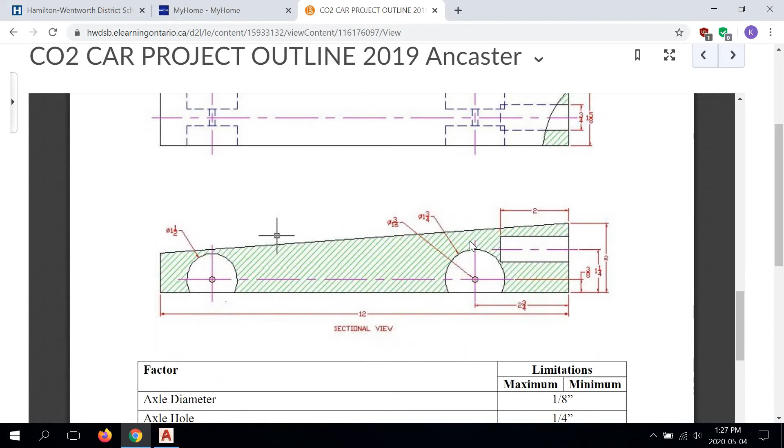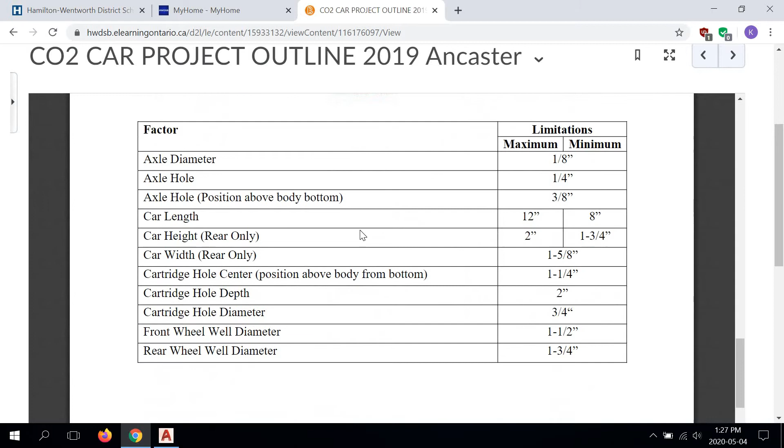Now, one thing to note, if we go into project outline, CO2 car, rear and front wheel wells are the same sizes used in the shell drawing. So we're using, again, 1 3/4 for the rear, 1 1/2 for the front. So nothing has changed in terms of diameter.

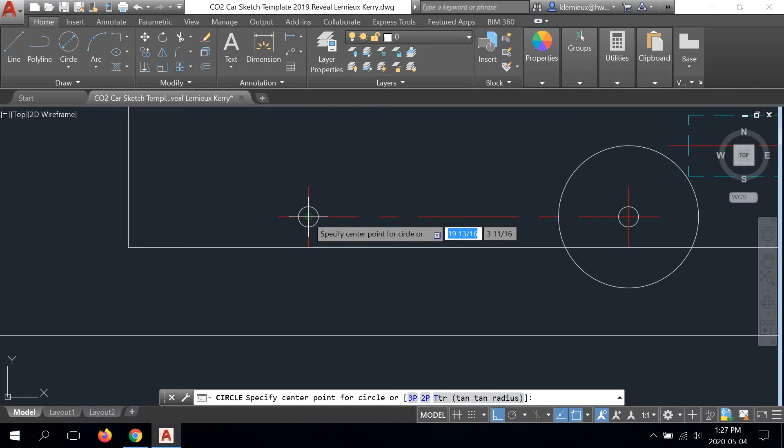So when we start with our drawing, we're going to use center diameter. We're going to start with our side view, snap the center of the axle hole, and then draw a circle at 1 3/4. And again, another center diameter circle for the front, and the front is 1 1/2 inches. As before, we're going to trim the bottom arc from the bottom of the CO2 car.

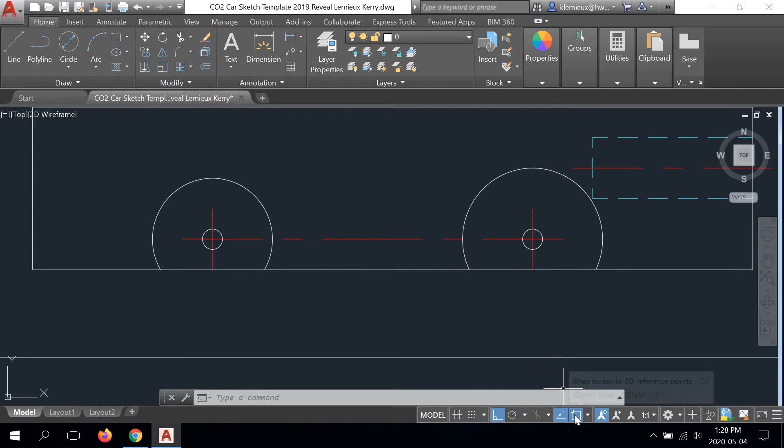And our center line is going to be gripped and extended 1/4 inch along this vertical quadrant and this horizontal quadrant on both sides. So make sure, if this isn't on, go into your Object Snap settings here, right click, left click Object Snap settings, and make sure Quadrant Snap is turned on to allow this to happen. If it is, hit OK. Mine's already turned on. And I'm going to pick the center line and I'm going to grip it 1/4 inch.

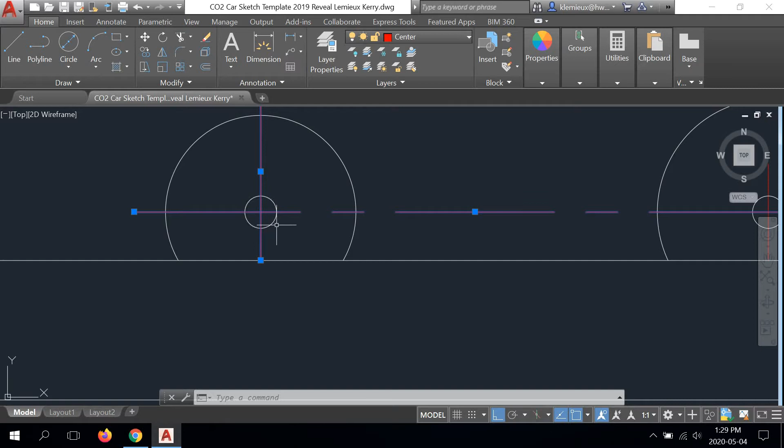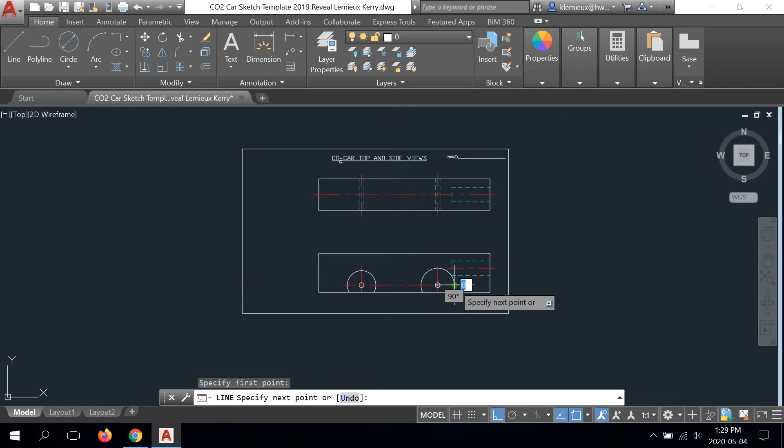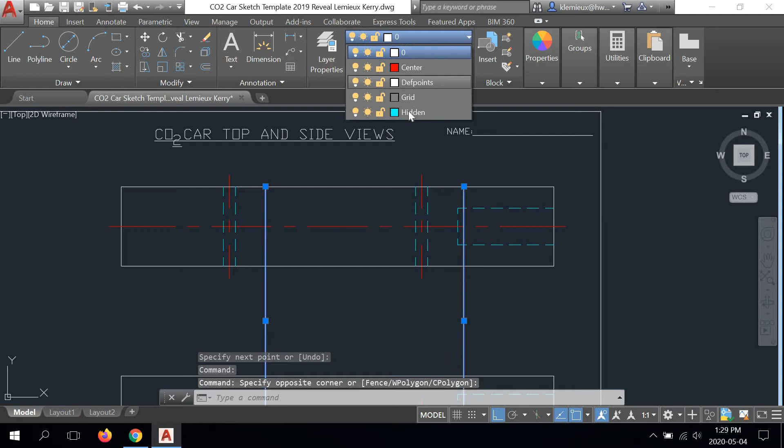Moving on, I'm going to use a line tool, go to the quadrant, draw the line up to perpendicular, and I'm going to do the same thing here. These lines are going to be turned into hidden lines, and I'm going to trim them.

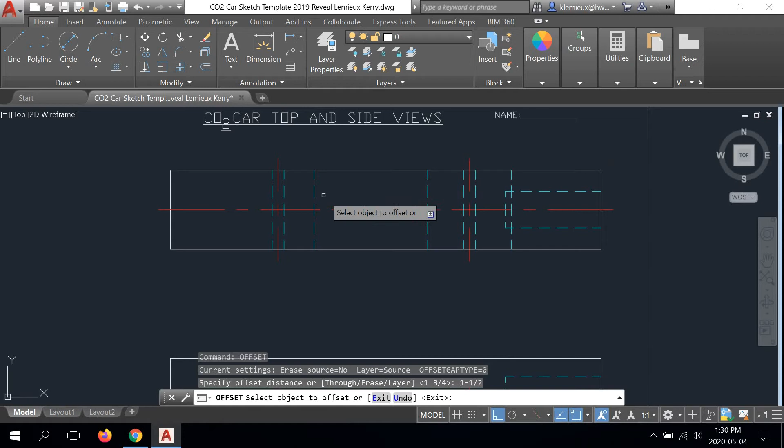Instead of drawing a line from this quadrant up, I'm just going to offset the last two lines. So we're using 1 3/4 at the back. Right click, repeat offset, and then we're going to use 1 1/2 at the front. Okay.

Now, the sheet said that we would use 5/16 at the rear if we want half our wheels to sit outside the body and half of the wheels to sit inside the body. So let's start with that. So we're going to go 5/16 offset. Offset this line up and this one down.

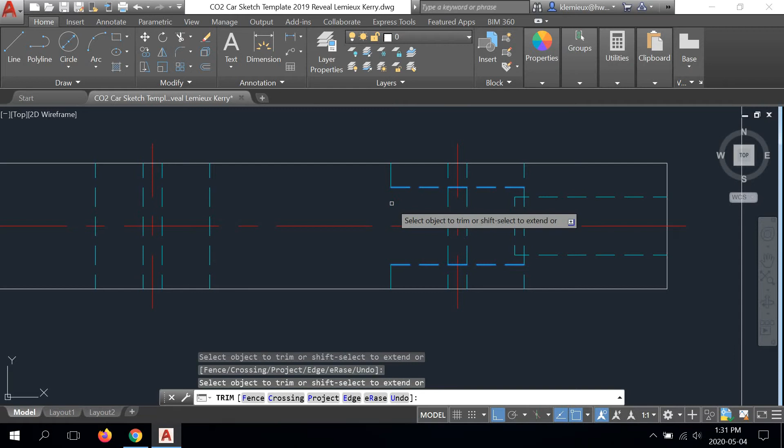We're going to trim, this line and this line are going to become hidden. And we're also going to be trimming between these two lines as boundaries. And so in this case, this section is solid and this section is shelled out on the exterior side. So we have a little bit more to do.

We have to trim the axle hole that's sitting inside the 1 3/4 diameter on each side. So we're going to trim the axle hole here and here, and there I have it. So that's how that would look correctly. That is a reveal style wheel design. And if I measure this, I'm getting 5/16 per side.

So this is an offset you can use if you want to have half your wheels inside your car, half your wheels outside your car. Now, what would it look like if you wanted all of those wheels inside the blank, right? We would have to increase our offset value. So what we can do is erase these lines, and we can use the 5/8 offset this time.

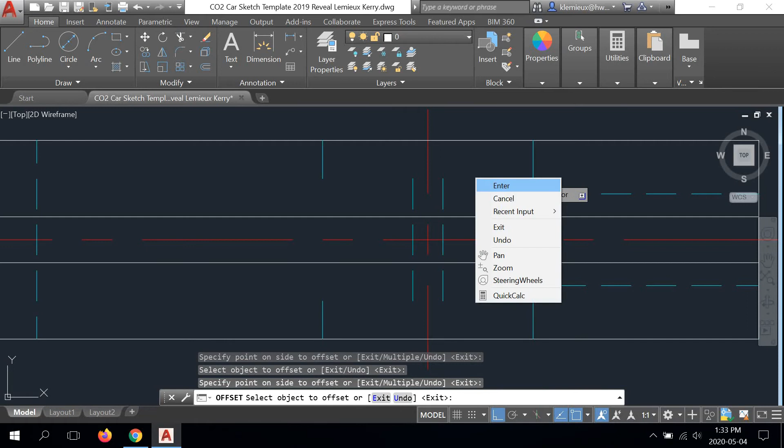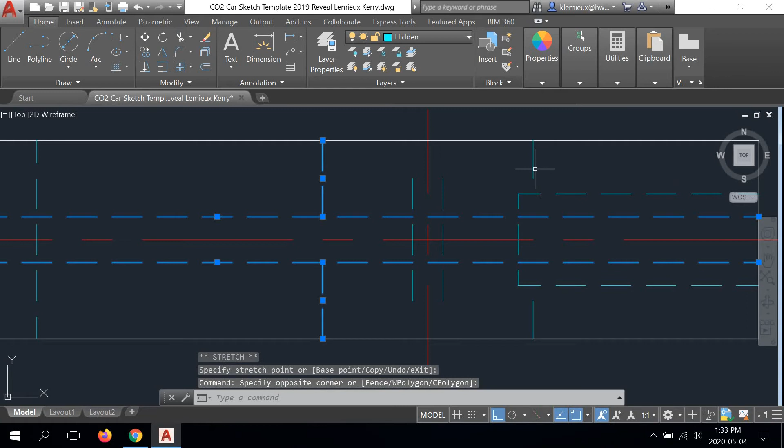And again, offset like this. These lines here are turned into hidden lines, and we have to extend this line perpendicular to the perpendicular snap. And then trim. And then we're going to trim again.

And that's what that would look like if you wanted the wheels totally inside your blank. So a little deeper, we've got 5/8 per side. And that leaves us with 3/8 of axle hole for our wheel bushings. Okay, so we're going to take a look at the front now.

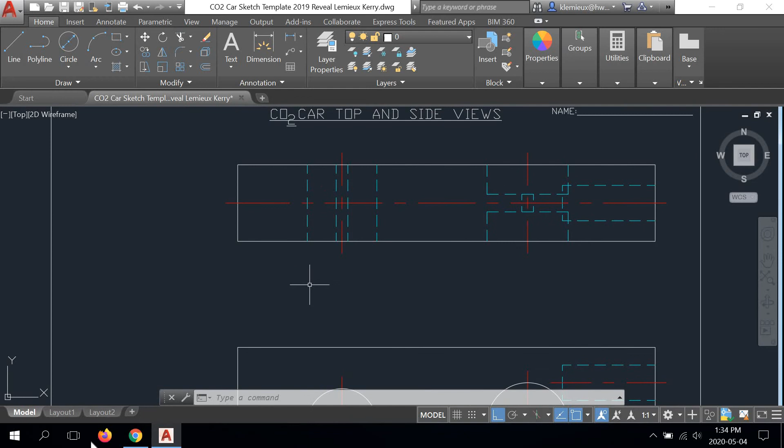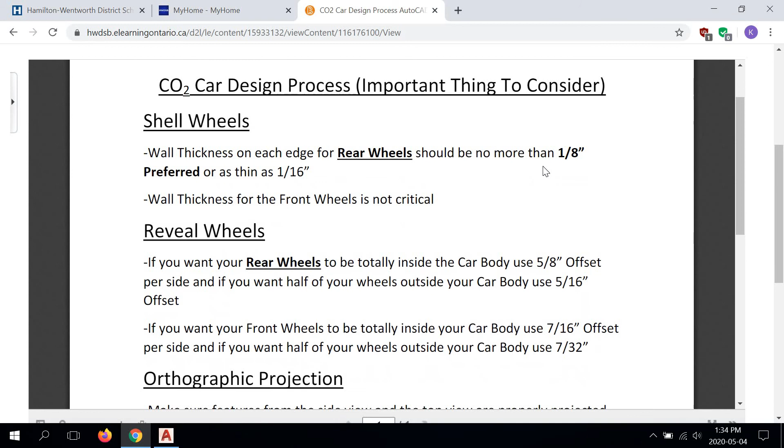So let's take a look at our design consideration sheet once more here. So it says if you want your front wheels to be totally inside your car body, use a 7/16 offset per side. And if you want half of the wheels outside your car body, use a 7/32. Okay, so a 7/32, that would be quite shallow. We'll start with that.

And it's the same deal as before. We're going to make these lines hidden. We are going to trim on either side of the 1.5 inch exterior boundaries here. We're going to trim between these two lines for the depth. And then lastly, this line and this line, which are for drill depth, are going to be used as boundaries to trim away the axle hole passing through air.

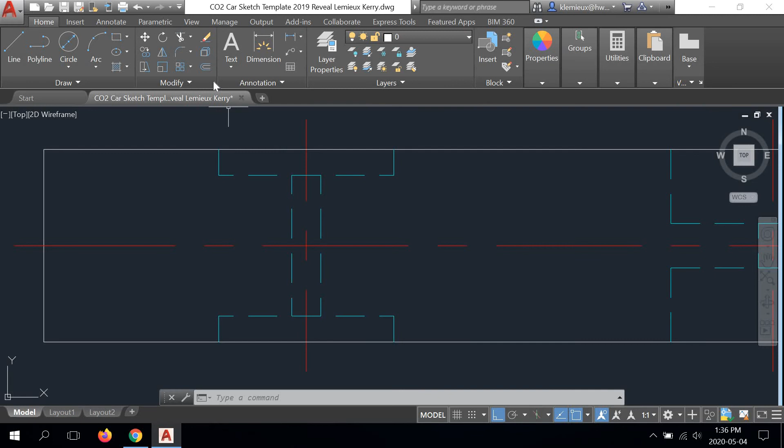So that's what your front would look like if you wanted half your wheels sitting inside and half your wheels sitting outside. Let's just do what we did to the back to the front. Let's take a look at the full drill depth size. So that is 7/16. Looks like this.

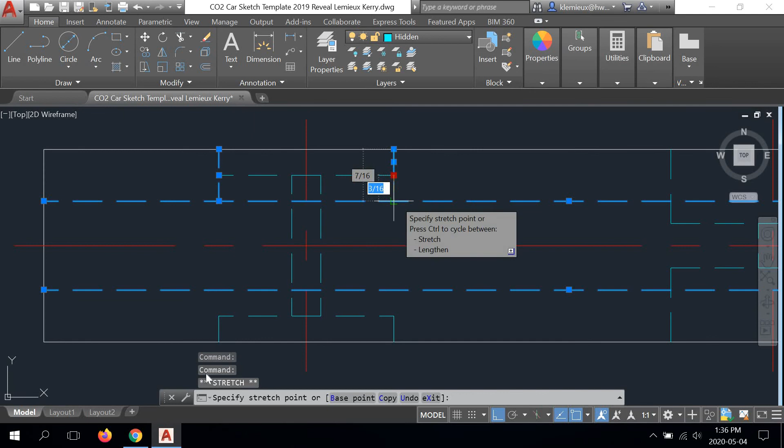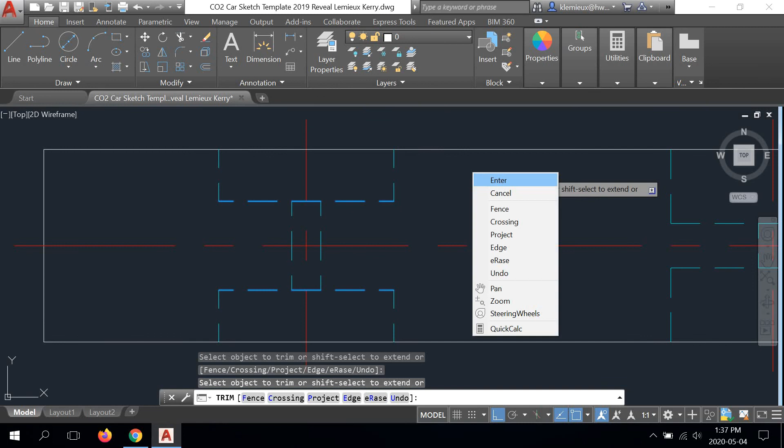So again, make these lines hidden. Use a grip. Snap these drill depth vertical lines to the perpendicular snap. And then we're going to be eliminating these two lines. We're going to be trimming away what we don't need. This line, this line, this line, and this line. Then lastly, these two lines as boundaries to trim away this extra axle hole depth. And that's what that looks like.

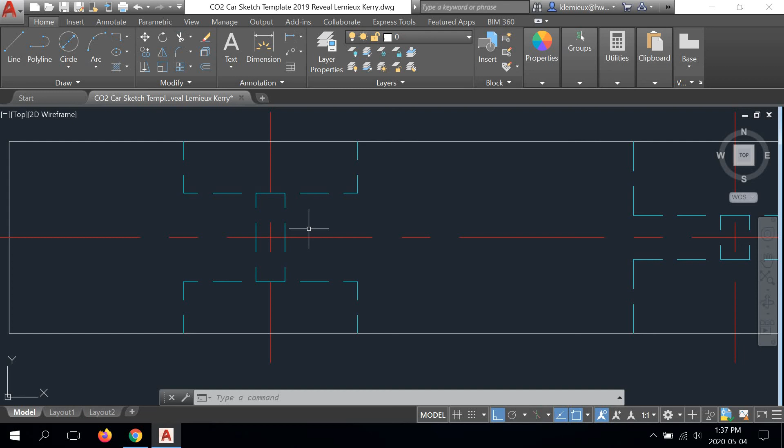Now, just because you see these numbers I've given you here doesn't mean you have to use them. These numbers are not set in stone. So you could, if you wanted, drill your front axles deeper than I'm showing here, or more shallow, or you can even drill these holes deeper if you'd like. It doesn't really matter. I'm not going to be marking it wrong if you don't use the offset values that I showed you today. The only thing that I care about is if it's being shown correctly, the correct orthographic projection, and that these features are lining up properly with one another.

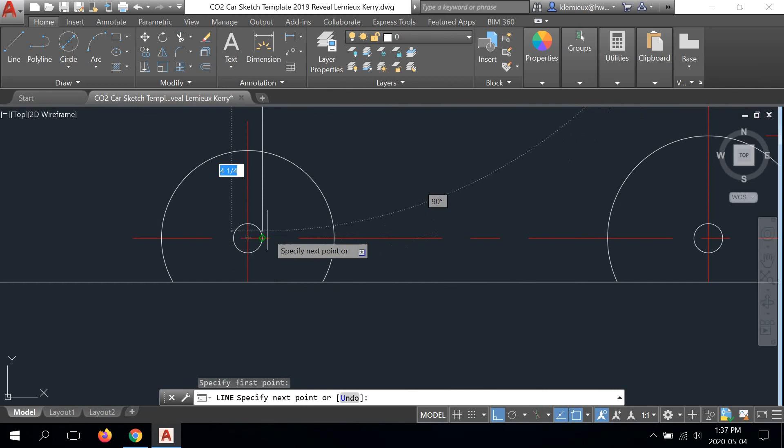Meaning, if I drew a line from here, would I meet the edge of my axle hole? Yes, I do. Right? So that's how I check these things. So again, I can draw a line from here, come down, and go to the quadrant of my side view wheel well. So drafting orthographic projection is very important. The numbers you pick for your drill depths are not so much. So just wanted to clear that up.

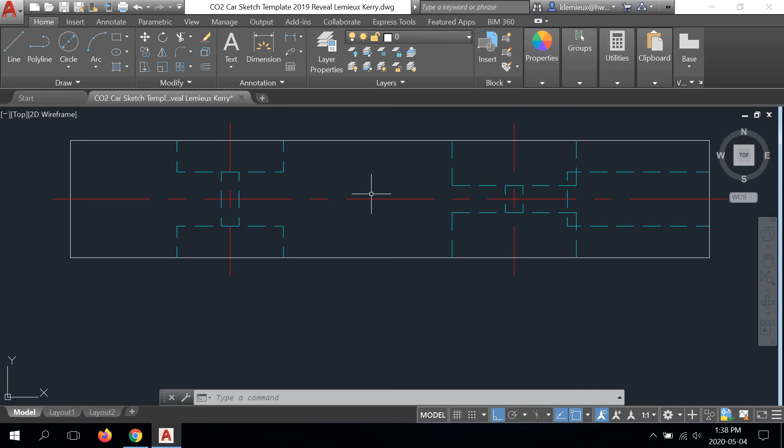I just want you to know that you're the designer and you have more control over this project than I think sometimes the student will realize. But that is how you show a reveal style wheel design. And the next time we talk, we'll talk about hybrid wheels.